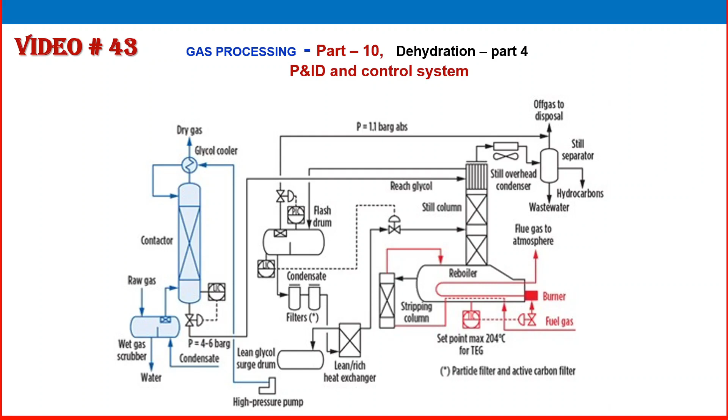Now we are going on gas processing. This video is gas processing part 10, dehydration part 4. In this video we are discussing the P&ID and control systems used in a dehydration system. Welcome to this video.

I have uploaded a P&ID, a typical sample P&ID of the absorber and stripper, so the entire dehydration system. In this video we are concentrating on how to read a P&ID, the important notations, symbols, and the various control systems using process variables here. So we are discussing that.

We discussed this in our previous videos, but once you see it in the P&ID, you will get a better understanding. So quickly I will rewind the process. What is dehydration? Dehydration is the removal of moisture from natural gas using glycol as the solvent.

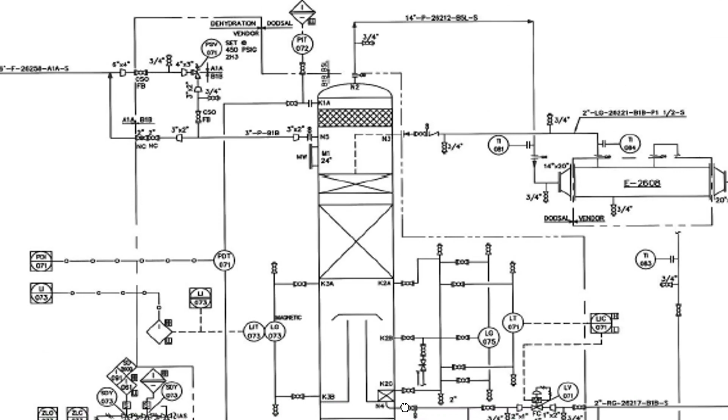So here the first process is the absorber. This is the absorber, I will just zoom a little bit. So the feed is natural gas. In the absorber, glycol contacts the natural gas and removes the moisture, dissolving the moisture into the glycol.

So the feed gas is coming from here and entering this one. The bottom part is the inlet knockout drum. Sometimes this is an integral part, sometimes it will be a separate knockout drum. Here it is an inlet knockout drum and an integral part. Doesn't matter. So what are the items here? Look at that.

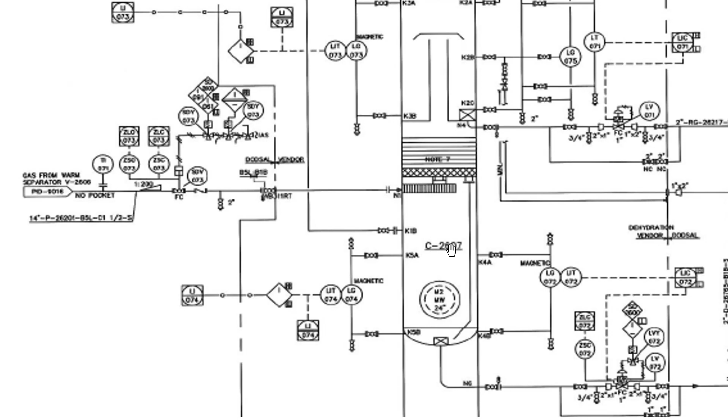It is entering here, and any liquids, contaminants, liquid particles, moisture, or free water available will settle here. It enters through an inlet deflector plate, which reduces the velocity of the gas and changes the direction. It gives a swirling action, and the free moisture and water settle here, and then it passes through a demister pad.

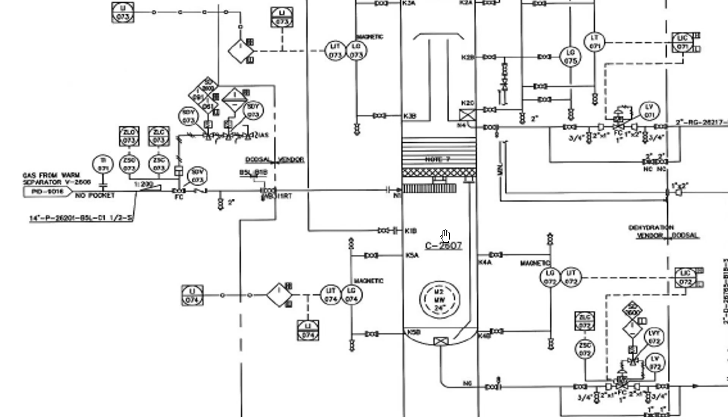This is another important internal, the demister pad. As it passes through the demister pad, all heavy liquid particles collect here. So a pre-separation is taking place that will affect the performance of the absorber. These two internals are very, very important in the dehydration process. Then it will enter here.

Inside here there is a chimney. The gas entering here passes through in this direction. There is a deflector plate, a diversion plate, that will collect here, and then it goes up like this. Unfortunately, this absorber is showing a packed column, not our regular bubble cap column. I will try to show that later in the video. It is a packed column system.

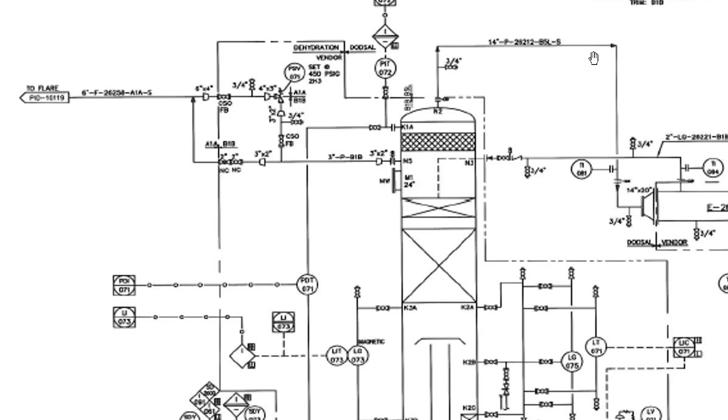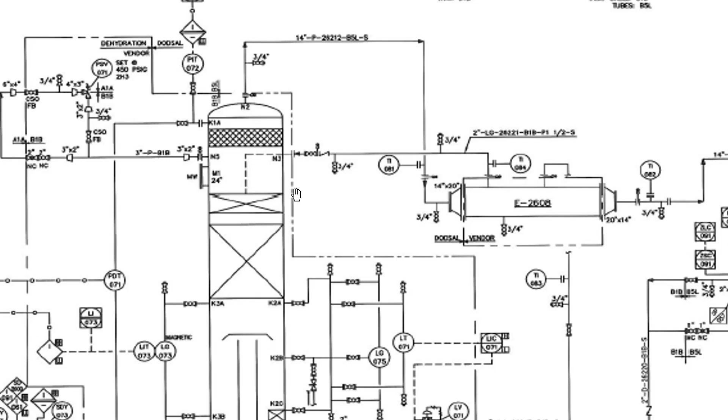It goes to a heat exchanger here, where the gas is actually heating slightly because it is cooling the glycol. Our important aim is to reduce the temperature of the glycol, as discussed in our previous class. Glycol temperature should be just above the gas temperature. Then the gas goes to the exit scrubber, the outlet knockout drum.

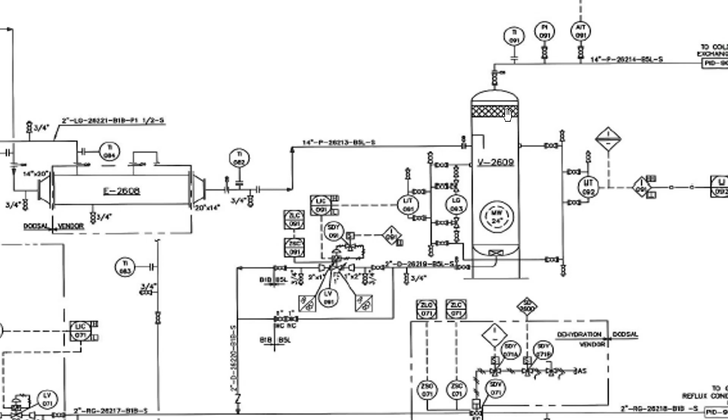It also has an inlet deflector plate, a different type of inlet deflector plate. Same thing, it collects the liquid particles, hydrocarbon and glycol particles here, then through the demister pad it goes to the distribution line. So this is the process in the gas line, in the absorber.

So we will go through the important process variables controlling the performance of this absorber. Whenever using this video, you have to read this in the proper way, each and every pinpoint. Any doubt is there, you can ask me, I will answer it.

So this one we have discussed: one temperature or pressure indicator is there, and here the shutdown valve is there. In any case of abnormality coming here, the SDV will close it. These SDV logics are there. This diamond box is an SDV logic. So this is the three-way valve, solenoid valves are there, instrument air supply is there.

All of it I have explained in detail in one of my videos on P&ID. In that P&ID series maybe one or two videos are there. You can check that one. A detailed discussion we have conducted there, so I don't want to discuss that one here too much.

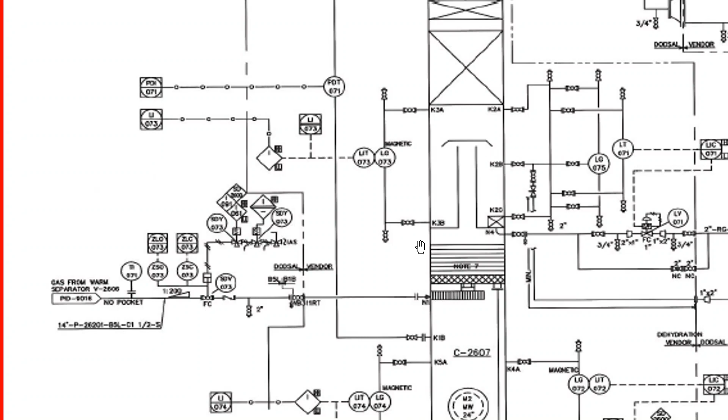So these are all the shutdown logics. See, every diamond is giving an individual shutdown logic, and SDVs are there, limit switch is there, and it is entering here. At the bottom you can see the level gauge, level glass is there, then level control, LIT, level indicator transmitter is there, and it is going to the shutdown logic, and to the level control. And what is the reason for that one?

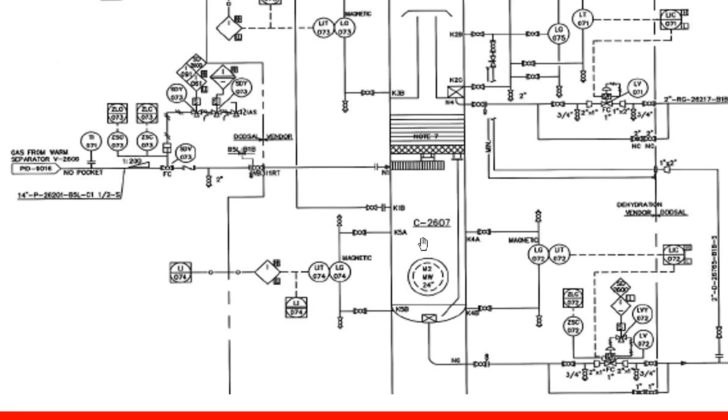In case the moisture level is increasing, it will carry over with the gas. So try to avoid the level going above a particular percentage. That's why a level control system is there. It is taking LG, level glass, and LIT, level indicator transmitter, then LIC, level indicator controller, and there are also high and low alarms out of that one.

Then it is going to LV. See, the LV is there, this is the level control valve. Just outside above that one, a solenoid valve is there, and a shutdown logic is also there. Whenever the level is increasing, it will trip. Whenever the level is decreasing, no level, it will also trip.

Because if no level is there, the gas will pass through to the downstream equipment. That is not acceptable. High pressure gas will pass downstream. So a minimum level should be maintained to prevent gas passing to downstream equipment, and to prevent the level going high and carrying over with the gas. These two conditions are maintained by this level control valve. That's why there is level alarm high and level alarm low.

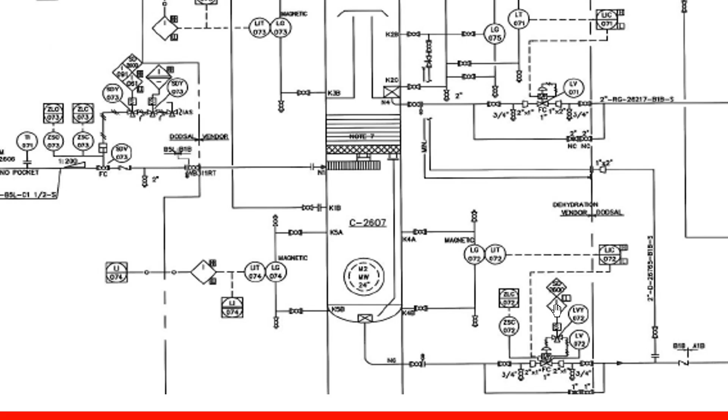And this one LG, LIT, LIC and LV. Also this valve will act as a fail-to-close valve. See, it is written here FC, that is a fail-to-close valve. So shutdown logic is also working here, and this liquid is going to the closed drain vessel. That's okay, clear.

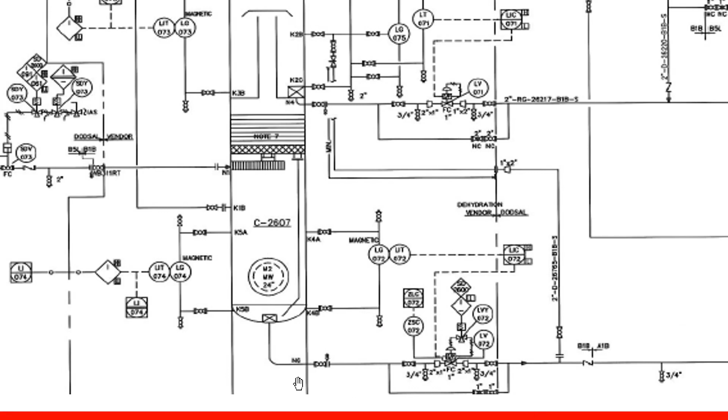So we have discussed the gas inlet, gas outlet, and in the inlet section moisture and free water is removed using the level control system. Another one is the glycol entering here. Glycol temperature we are always maintaining. Where is the inlet glycol temperature maintained from? Glycol is coming from here, this line is coming from here.

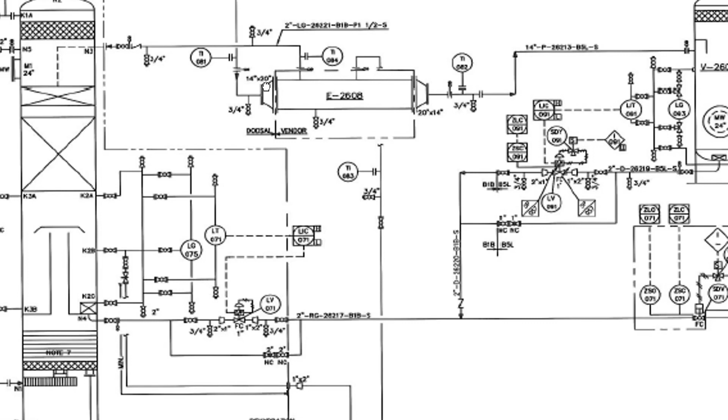See, the inlet temperature before the heat exchanger. It is entering the shell side, and the outlet is here. The outlet temperature also. There is no control on this one; the temperature control may be somewhere else. We can see whether it is available or not. So temperature is also maintained here. It is entering here through an NRV, and the isolation valve is also there.

It is distributing here, and after absorbing or dissolving all the moisture particles, glycol is settling here, in the area below the chimney. See, this is rich glycol. You can see it going out from this one. This is the glycol going out, going to the condenser. Actually, it is going to the regenerator, glycol regenerator.

In this line, you can see level glass is there, LT is there, LIC is there, and LV is there. See, LT, LIC, LV. That is the level control system for the glycol, maintaining the level here. The glycol level should not increase above a particular level. If it is increasing, it will carry over with gas. So it should be well maintained. That's why LG, LT, LIC and LV are there, so that the level control works perfectly here.

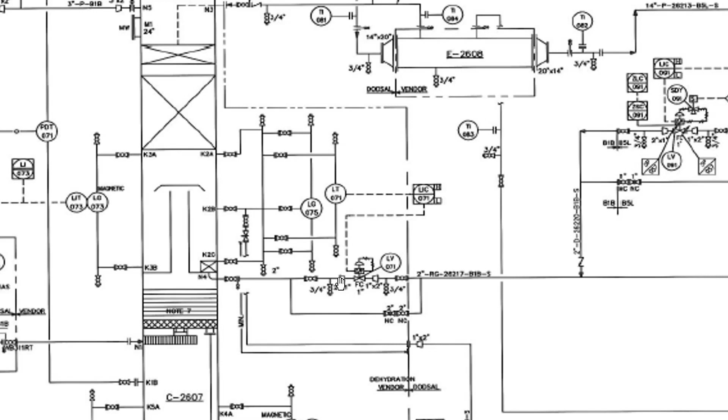And on the other side, LG is also there, LIT is there. It is going to the shutdown logic. What is the shutdown logic? High level of glycol at the bottom of the absorber and low level of glycol at the bottom of the absorber. These two safeguard systems are connected here on the level side.

So the level is well maintained here, and the safeguard system is also there. It will lead to a shutdown. That shutdown logic is connected here, and this SDV will work. Not only this SDV, many other SDVs will work. Any fail-to-open or fail-to-close valve is connected to this. The entire shutdown logic will work according to its logic.

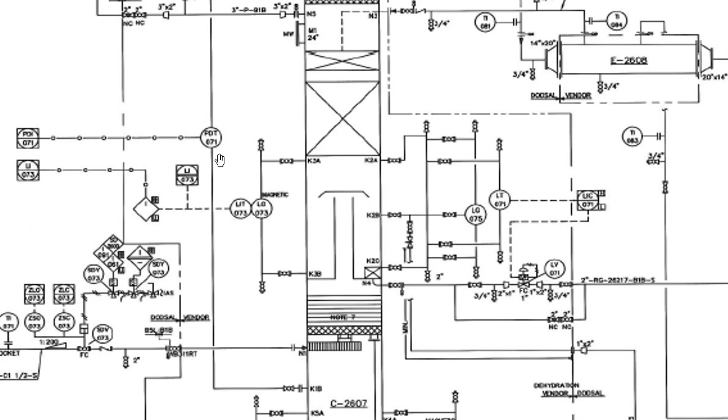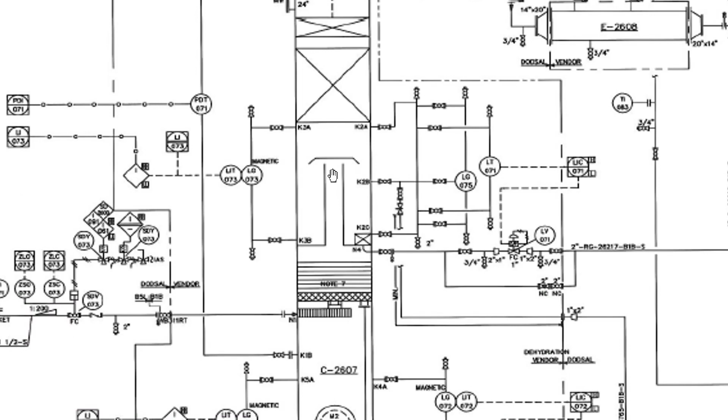And here also a PDT is there. What is that PDT? Differential pressure transmitter, covering the entire tower from the bottom to top. The differential pressure should be zero, meaning there should not be any pressure difference inside. That would indicate choking inside the tower. So we can check the inlet deflector plate, the demister pad, the chimney, the packing, and this demister pad. This safeguarding system covers all of that.

If the PDT is increasing, that is, differential pressure is increasing above a particular point, safely say about 5 psi, that means inside the absorber there is choking or foaming or whatever it is. So smooth performance is affected and decreasing. So we can find that out and correct it properly.

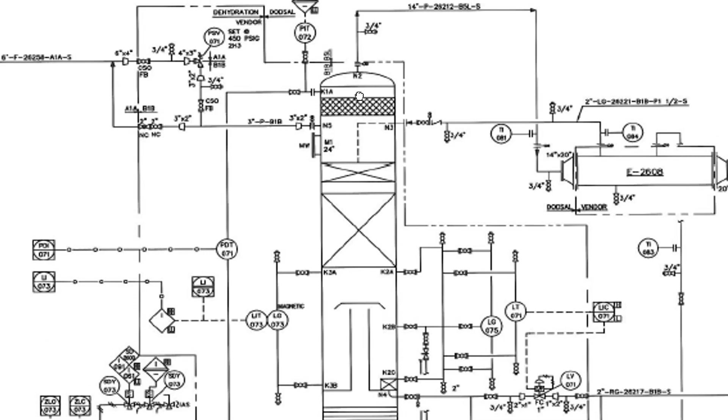Another one is the pressure transmitter. See, the pressure transmitter, PT, is there. This line is taken from the top, and it is connected to another shutdown logic. All that logic is connected to our previously mentioned SDVs.

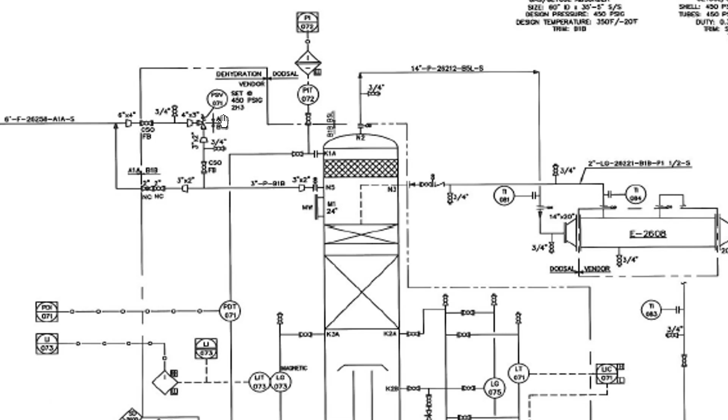And the last safeguarding device, the PSV, pressure safety valve, is also connected. In case all the safeguard systems fail, that one is a mechanical system. We have discussed it in our previous classes. That PSV is connected to the flare or releases to a safe location. So these are the important concepts.

And about glycol I have to discuss some more. Here also is the liquid connection, which I didn't discuss. Whatever liquid is collected here is joining back to the glycol system, including moisture. There is also a level control system, because the liquid level including glycol cannot increase much, or it will carry over with the gas and we will have a huge loss of glycol. That's why the level is maintained properly. Level control systems are there, connected with a shutdown logic, and here an SDV is also there.

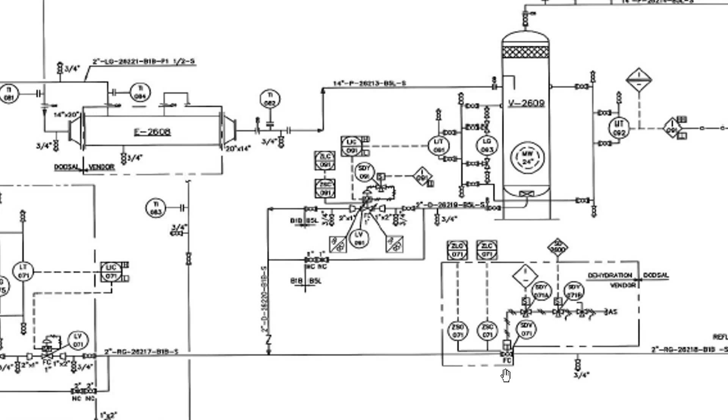See, two shutdown logics are connected with a three-way solenoid valve with instrument air supply, and the shutdown valve SDV, a fail-to-close valve. This is the shutdown logic, this is the three-way solenoid valve, this is the instrument air supply, this is the SDV, and this valve's behavior is fail to close. In case the instrument air supply is lost in any condition, this valve will go to the closed condition. That is an FC valve. So these are the important things.

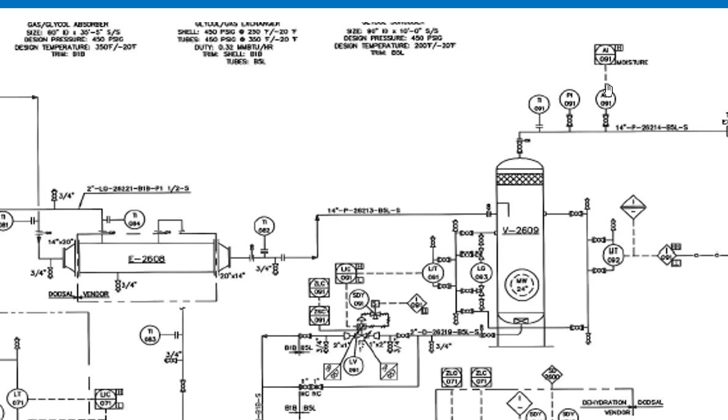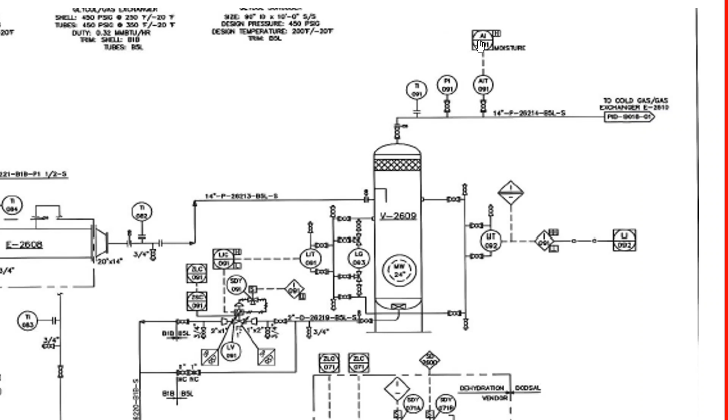Another very important one to discuss: the final temperature is measured, the final pressure is measured, and another one is the AIT, the analyzer. What type of analyzer do we keep here? The important one is a moisture analyzer. The recommended moisture level is always checked to see the performance of the absorber. In case moisture is not removed, they can route this gas back to the absorber again. This AIT is an analyzer indicator transmitter connected to the DCS, and if high moisture is coming, there will be a high alarm.

If any of you are less confident in P&ID, please review my previous video about P&ID, piping and instrumentation diagrams, to understand this properly. This is a basic fundamental, so go through it and understand it properly.

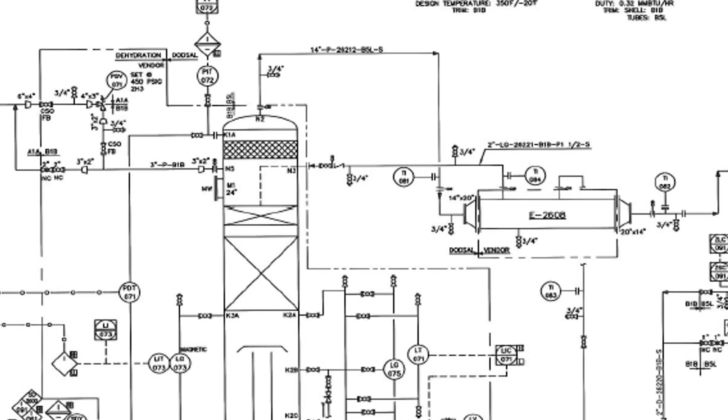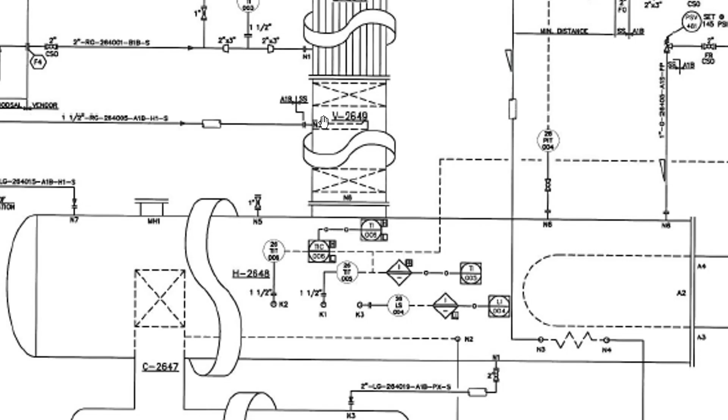This area is the stripper area, we can call it the stripper area. This is the stripper condenser at the top, and this is the reboiler. Many companies use different types of design, but in this company, the P&ID I have available looks like this one. So glycol is entering for preheating here.

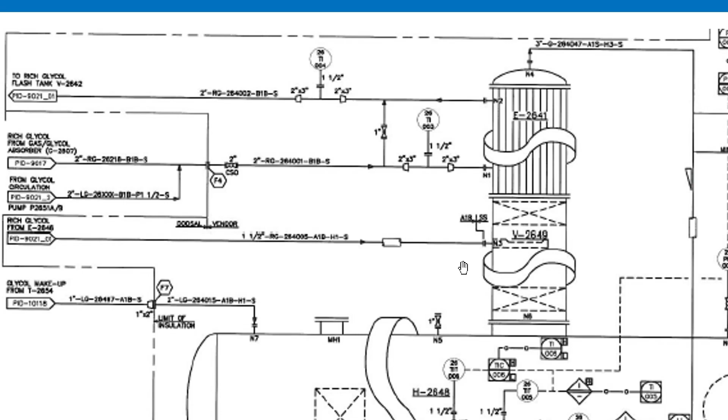The preheating glycol is cooling the water vapor outside. That is also possible. So this is the water vapor going out. Glycol actually enters here, at the top of the packing column, somewhere here it is entering. Then it passes through this packing, and it will enter the reboiler.

This is the reboiler coil. See, look at that one. This is the reboiler coil. The level is always maintained at this level. We have discussed the process in the previous classes; here we are only showing the P&ID. So this level is always maintained, and various temperature controls are there, which I am coming to.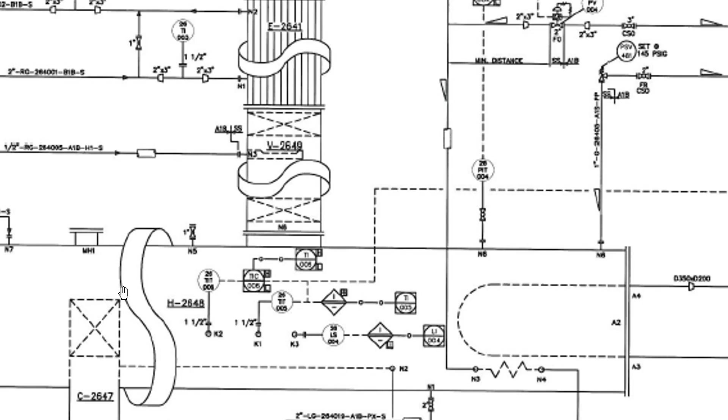And here there is a still column. The column level is maintained here. Whenever it overflows, the lean glycol passes to the surge tank. That is the surge tank. Extra glycol level is maintained here. This is the lean glycol. That lean glycol passes through various pumps and other things, and goes back to our absorber.

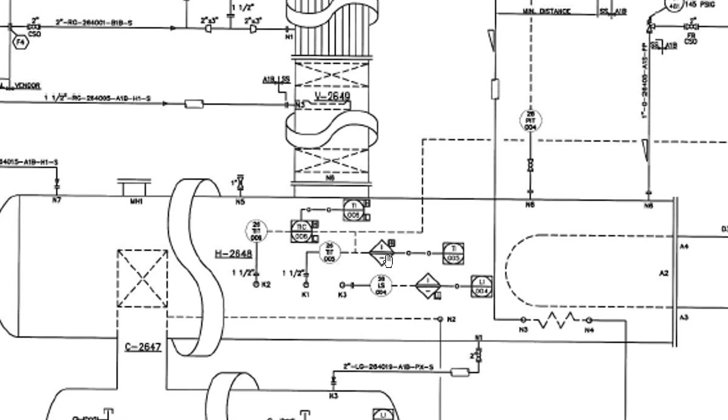So in this one, mainly we have to discuss the temperature. The reboiler, as discussed in the previous class, maintains the temperature of glycol around 115 to 125 degrees C. The temperature control systems are here. The firing method is not shown here. This is the coil. Maybe it is an electric coil or firing, whatever it is.

And this one, you see, temperature control is there, level control is there, LI is there, and it is connected to a shutdown logic. See here, a level switch is there, which will automatically trip the burner or heater, whether electrical or gas firing.

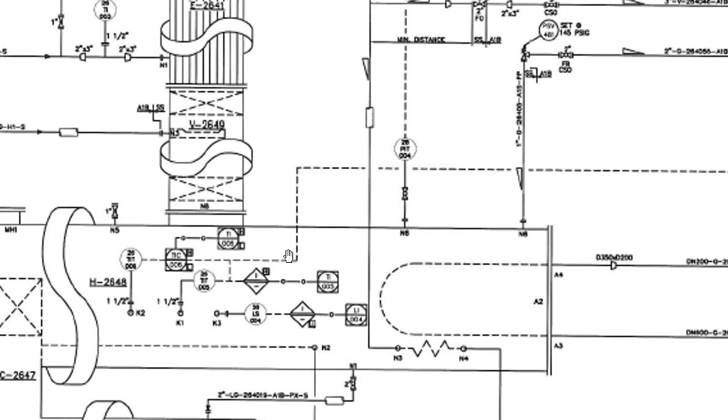And temperature also, see, TT is connected here. A thermocouple, bimetallic, or resistance type, any type of temperature sensor is here, and the TT, temperature transmitter, is connected to the shutdown logic. In the DCS also we can see the temperature, and it is also going to other locations, to other drawings.

And here also another one, see, it is 1 out of 2 voting. Another temperature indicator controller is there. Why this one? This controller is connected to the fuel flow control valve, FCV, or temperature control valve. It has high and low alarms. And in the DCS there is a temperature indicator with low and high alarms.

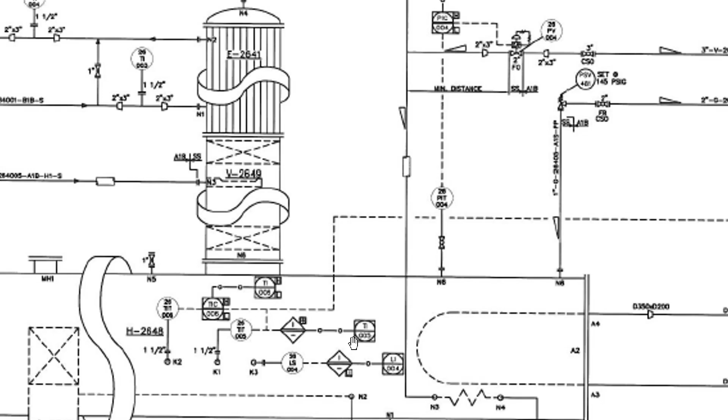So the temperature of the reboiler is well maintained and controlled, and the level of the glycol should always be maintained above the heating coil; that is also well maintained here. These two conditions are covered here, and temperature and level safeguards are there.

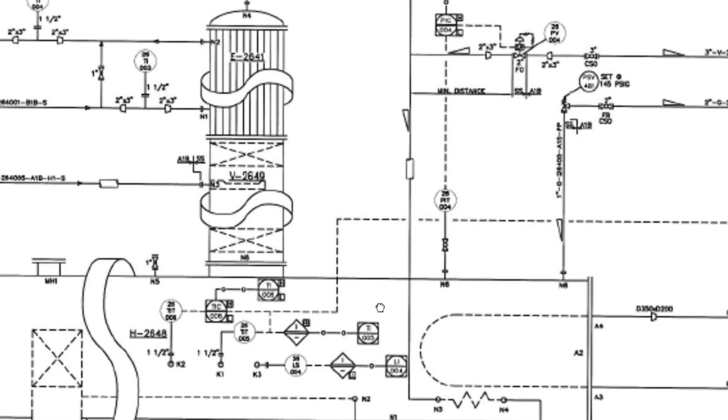Another one is the moisture, free water, going out and releasing to the atmosphere. And here, pressure in the reboiler is also taken care of: a pressure indicator transmitter, PIC, a pressure controller, PI, PY, and a pressure control valve, PV, which is fail to open. So if the pressure is high in the reboiler, it will create a shutdown and release the free water from here, and a pressure safety valve is also there.

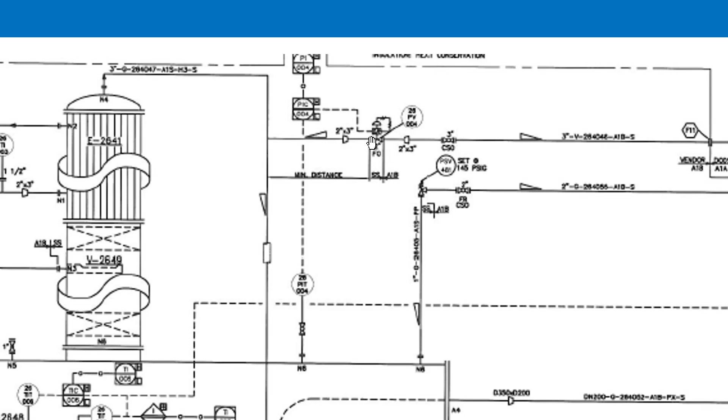So read this properly and understand each and every point here. In the condenser area, as we discussed in our last class, the temperature of exit water vapor is maintained around 102 or 103 degrees C to prevent glycol loss. If the temperature increases too much, glycol loss will be more, and if it becomes less than 100 degrees C at atmospheric pressure, water will condense here, so water vapor will not release.

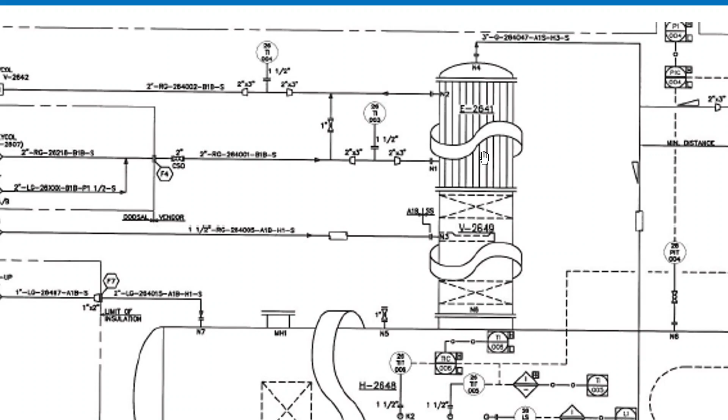That increases reboiler load. So these are the temperature indicators; there is no controller shown here. So this way it is working fine. These are the important points. Yeah, one more point I forgot: in this one a level indicator controller is there. See, LI is there, LG, level glass, is there, then LIT, the level indicator transmitter.

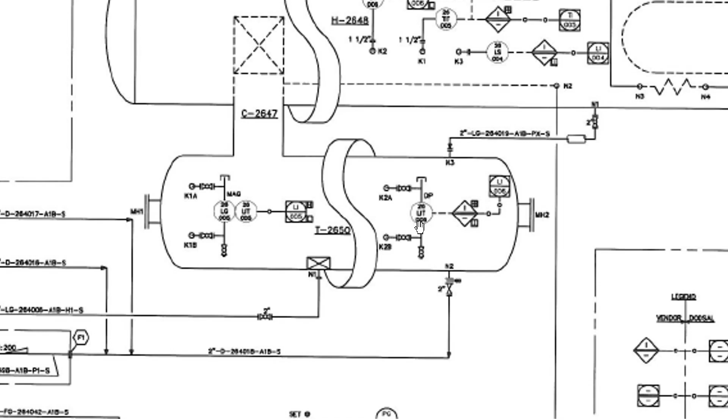In the absorber level, say flash drum or surge tank level is maintained here, and here also a tripping condition is there. See, LI and LT are there, and shutdown logic is there, and LI in the DCS we can see, this one. See, this is the shutdown logic. Just two symbols, the legend is showing. That's all about P&ID reading.

I request you to read the P&ID in a proper way, and please contact me if you have any particular doubt on any of the information.

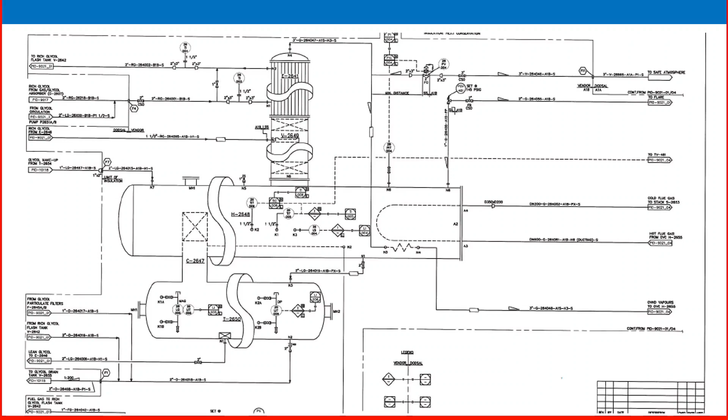So quickly I will go through some of the information. That is safeguards. Already we discussed the safeguards. In the absorber, temperature, pressure and level are very, very important. In the reboiler, it is temperature and pressure. Also the level of the reboiler, the glycol level in the reboiler, is also important, that we discussed.

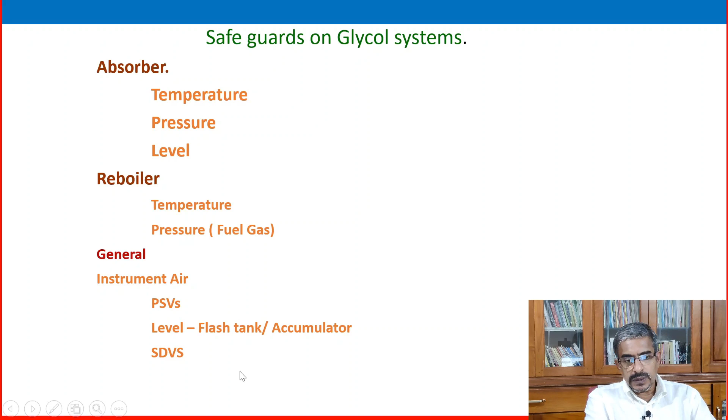In general, instrument air pressure is very important. If sufficient pressure is not getting from instrument air, that will create a shutdown. Then PSVs are important. Level in the flash tank and accumulator is important. SDVs are important. And this item we have discussed in our earlier classes, even though I will just go through it.

Glycol dehydration troubleshooting. High dew point temperature, what are the troubleshooting issues? Check reboiler temperature, check stripping gas flow, check circulation rate, check operating condition, check for foaming. Wet gas inlet temperature: too low, increased glycol viscosity, foaming problems and increased glycol losses. Too high, too much water and poor dehydration.

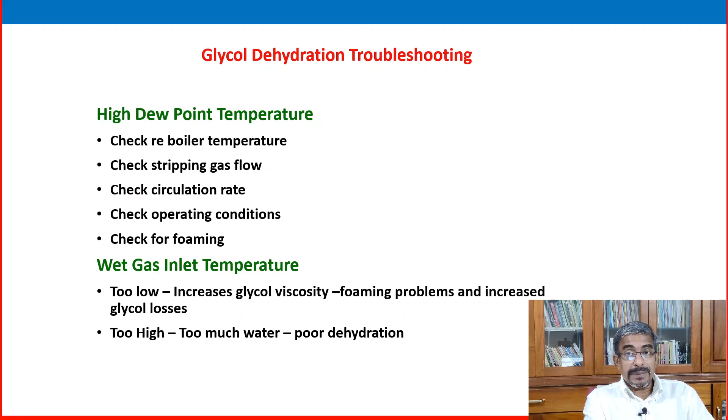This is the wet gas inlet temperature at the absorber inlet. If it is too low, increased glycol viscosity, foaming problem and glycol losses. Too high, too much water, poor dehydration. When the pressure is increasing, free water will be increased. Temperature is increased, free water will be increased.

And differential temperature. Low differential temperature can promote foaming. What does low temperature differential mean? The inlet gas temperature and the inlet glycol temperature. That will be the differential temperature. High differential temperature can cause increased glycol loss and higher dew point temperature.

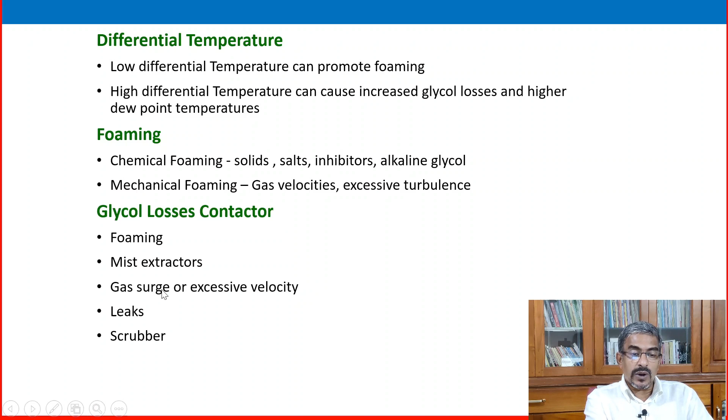Another one is foaming: chemical foaming, solids, salt, inhibitors, alkaline glycol; mechanical foaming, gas velocity, excessive turbulence. Glycol loss in the contactor: foaming, mist extractors, gas surge or excessive velocity, leak and scrubber.

This one is the stripping gas for improving the glycol purity. If it is too much, then it will also decrease the glycol purity. High tower top temperature, that I discussed in the previous slide. High reboiler temperature, that also the same problem. Damaged or fouled packing: any damage or fouled packing means choking is coming. Leak in heat tubes, our heating coil leakage.

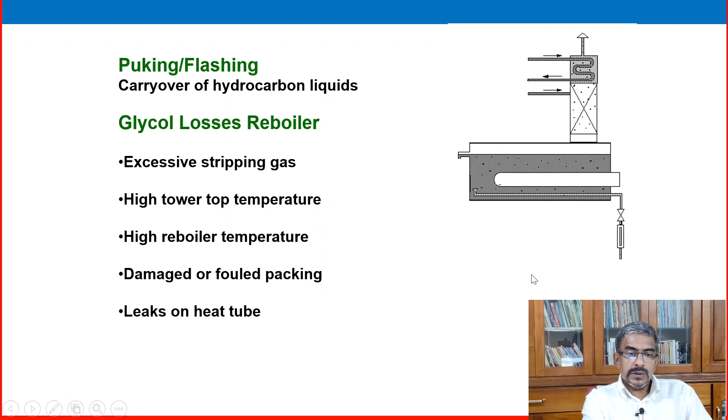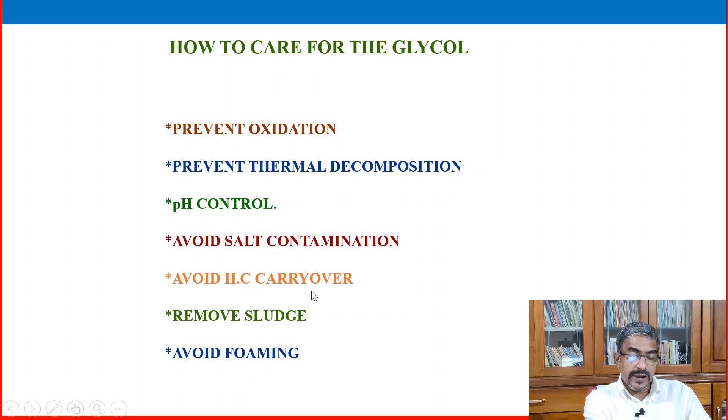How to care for glycol? Prevent oxidation, that is, control temperature. At high temperature glycol starts to oxidize. Prevent thermal decomposition at very high temperature. It will change the entire property, then we cannot use that glycol again. pH control, very important. Avoid salt contamination, very, very important. Avoid hydrocarbon carryover. Remove sludge, avoid foaming.

And routine operator checks, quickly we will go through that one. We have discussed this in almost our 4 sessions. Still we can go through just to read it. Check levels in each vessel. Check pressure, you have to read that one.

Check the temperature, check the flow of glycol to the contactor, check the pressure of the glycol gas vessel and flash vessel, check reboiler temperature and reset it, and level in the surge tank, check the water content and dew point of outlet gas, inlet gas flow rate, if it is changed, change the glycol flow rate, check the inlet gas temperature, check glycol pH and adjust.

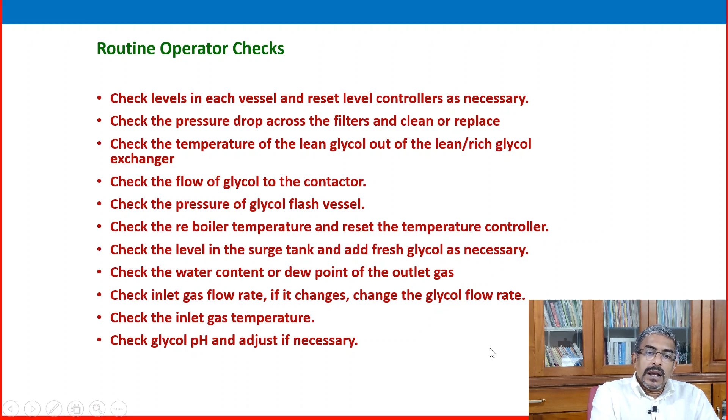Yeah, thanks for watching this video. I think the glycol session is almost over now. And definitely we will go to any other pending modules in gas processing. I will check that one, or I will start some other latest session from oil and gas operation.